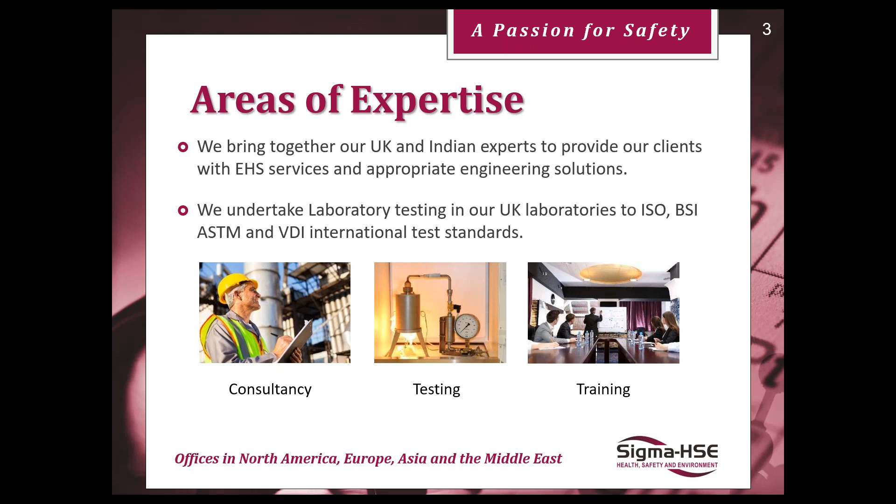We are a global company with headquarters in Winchester in the UK, as I've mentioned. We've also got offices and laboratories in India and a new office in the United States. Within the consultancy arm of the business, we deal with everything you'd expect in preventing and dealing with fires and explosions - all aspects of process safety management, industrial fire and explosion hazards, experts in electrostatics, and so on. We also do a lot of bespoke training for companies on these topics.

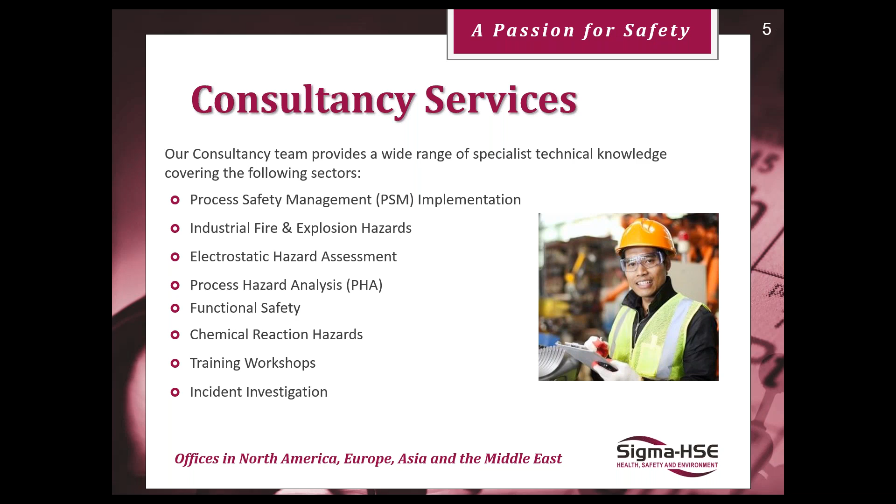We also have the luxury of accredited laboratories working under accredited quality management systems to pull apart substances and determine their properties, whether that's gas, vapor, powders, solids, electrostatic properties of materials, or chemical reaction hazards - calorimetry, DSC, differential scanning calorimetry, and all of these things - all with the aim of fully understanding the properties of the substance. Because everywhere in health and safety we need to do a risk assessment to determine that what we're handling, and how we're handling it, is done safely. We don't want fires, we don't want explosions. They tend to result in significant harm to humans, to the environment, and definitely to the business.

There have been lots of major incidents that have occurred with combustible solids. So what I want to do in the next 40 minutes or so is give you a few things to talk about and pass on some of my experience dealing with dust explosibility testing information, how that's used in practice, and why it's so important. My primary focus will take you through the tests and the sorts of information they give, but most importantly, how that test information is then taken within your processes to make them as safe as they can be.

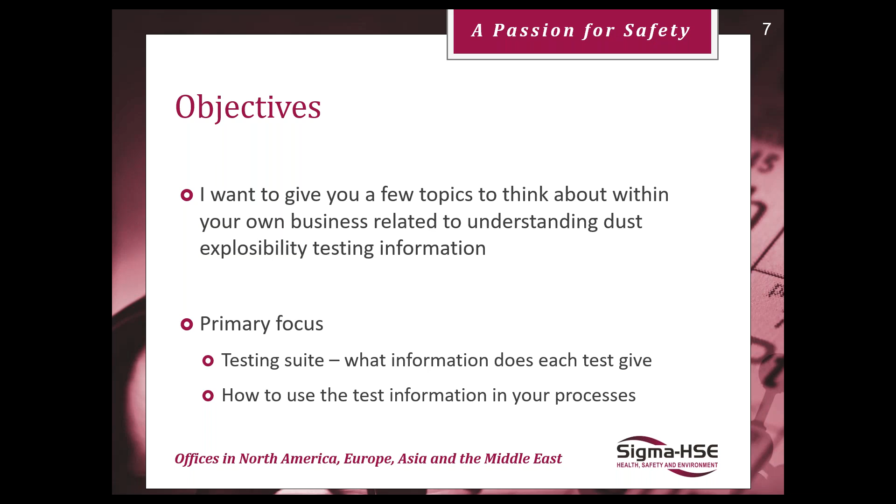As with any risk assessment, the first step is identification of the hazard. In many respects, especially when dealing with liquids and gases, we're given a clue as to what the hazard is because it comes with hazard pictograms on the container. I've given a couple here for toxic substances and flammable substances. If we're dealing with a flammable liquid like gasoline or acetone, the container and material safety data sheet will tell us how to handle that material properly and give us flammability conditions and properties of the material. When we're dealing with combustible powders, very often that's not given.

There are no pictograms that we stick on many powdered solids that could combust, and many of them are very common. Things we use in our kitchens at home, like flour, sugar, and icing sugar, will indeed combust, and combust quite readily.

But of course when we buy our bag of flour or icing sugar, it doesn't mention that it's a combustible solid. In an industrial situation we have the material safety data sheet, but very often that doesn't give us much information at all. It often simply states that it may be capable of combustion, but doesn't give any specific properties of that material, so it's a little difficult to use that information to prevent fires and explosions.

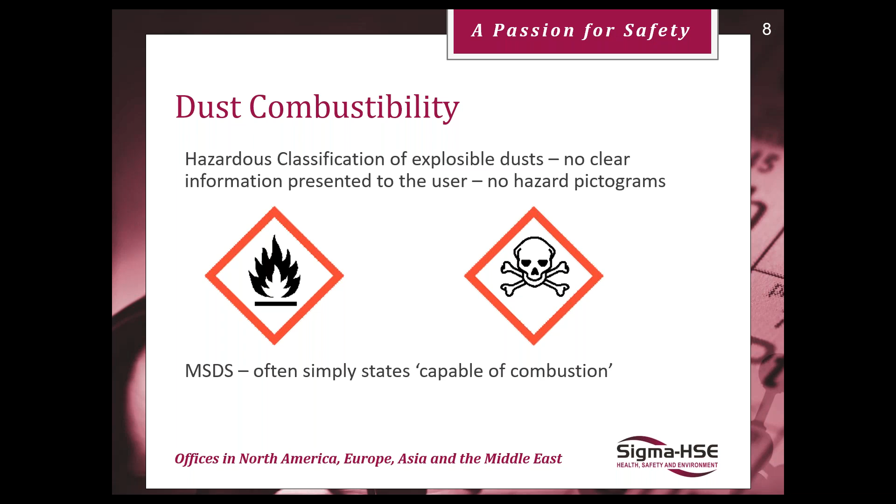As you'd expect, there's legislation on the topic - in Europe and similar legislation in the US and elsewhere. We have the ATEX legislation in Europe and the UK. Essentially, if I boil that legislation down into three simple questions, the first is: avoid generating what's known as a flammable or explosive atmosphere, which is basically a mixture of a fuel and air that's capable of combustion if it sees an ignition source.

This is simply built around what's known as the fire triangle. For combustion to occur, for something to burst into flame, we need a fuel, we need air or oxygen, and we need an ignition source. So very often, for example, for a flammable gas like natural gas, methane, when it's in the pipes it's 100% methane - there's no air in there, so it's not flammable, even though the container will state it's an extremely flammable gas. In practice, it won't be - it can't ignite because there's insufficient air.

Of course, if we have a leak from that system and release methane into the general atmosphere, it will then mix with air and produce this flammable explosive atmosphere. So the first point is: can we avoid generating that flammable explosive atmosphere? The second tenet of the legislation is, if we can't avoid generating that flammable atmosphere - because after all our containment systems could leak - then don't ignite it.

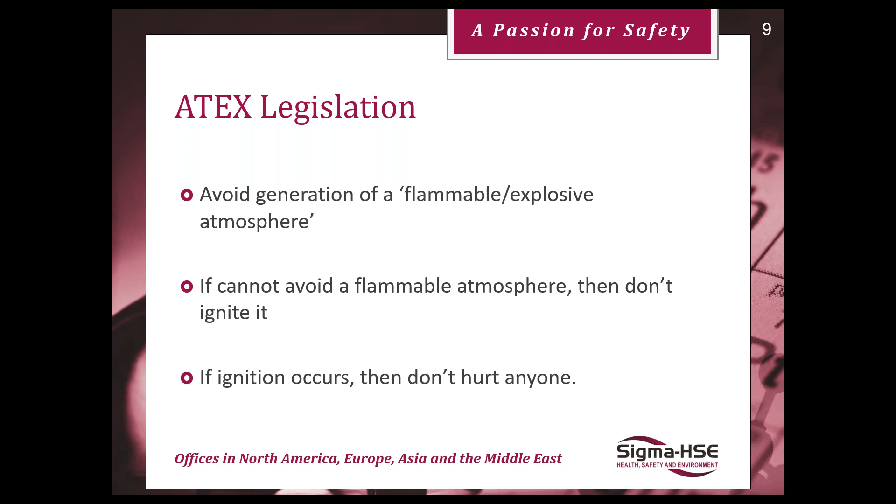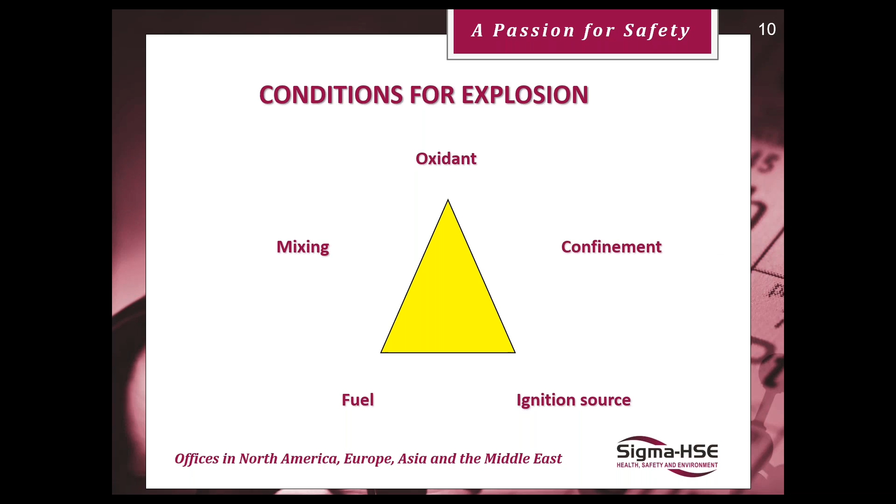So I talked earlier about the fire triangle. To turn that into an explosion, if we add into the fire triangle mixing - we get good mixing of the oxidant and the fuel - and we get some confinement that restricts the spread of the flame, then we can generate explosion overpressure. You often hear this talked about as the explosion pentagon.

Mixing a fuel with air in the open, we can still have the mixing, but the confinement won't be there, so we'll end up with a flash fire - we won't get any explosion overpressure from that event. But if that occurs within a container, like a silo or a pipe, then pressure can be developed, and it transitions into an explosion rather than simply a fire.

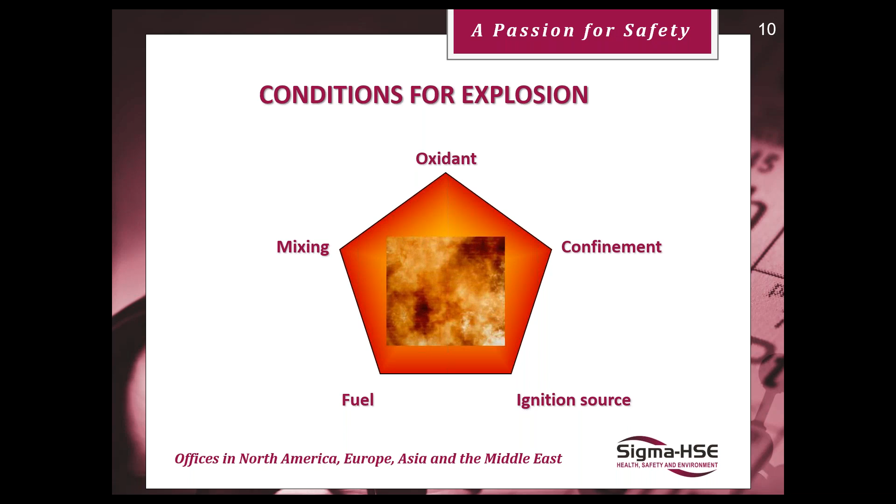Now let's go right back to basics and take you through what a combustion reaction really is. It's nothing more than a chemical reaction - we are reacting a material with oxygen. So if that material is not fully oxidized, then in theory it's capable of combusting, capable of reacting with that oxygen and generating an exothermic reaction. So it will generate heat that could result in flames.

It's worth saying that on the whole, liquids and solids don't combust - it's the vapors and gases that combust. As we heat substances up, they can generate vapors, and it's the vapors that mix with the air and then undergo this chemical reaction. So combustion is just an oxidizing chemical reaction - that's all it is.

There are many substances out there in the food world and the pharmaceutical world where they may not be classified as flammable or combustible, but they will combust.

Where solids are concerned, the reaction is no different, but for this we then become a solid reaction—it's a surface reaction. That oxygen needs to react with the powder, with the solid, and it can only do that by starting off surface chemistry in the first place.

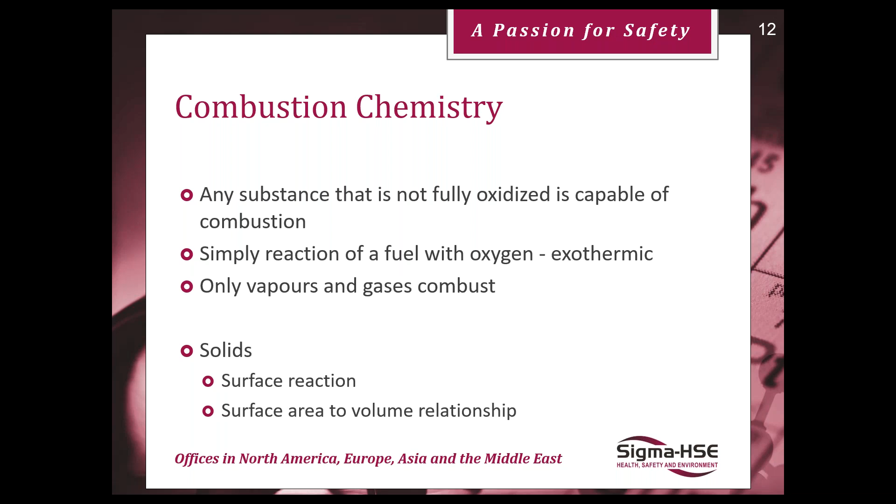Because of this surface area to volume relationship, the fineness of the powder, the dust, determines whether or not it's effectively going to be combustible. Generally speaking, we need powders fine enough that are less than 500 microns for them to be combustible. Now, many of the powders you use may not be that fine, but they may have a fraction of material that's less than 500 microns.

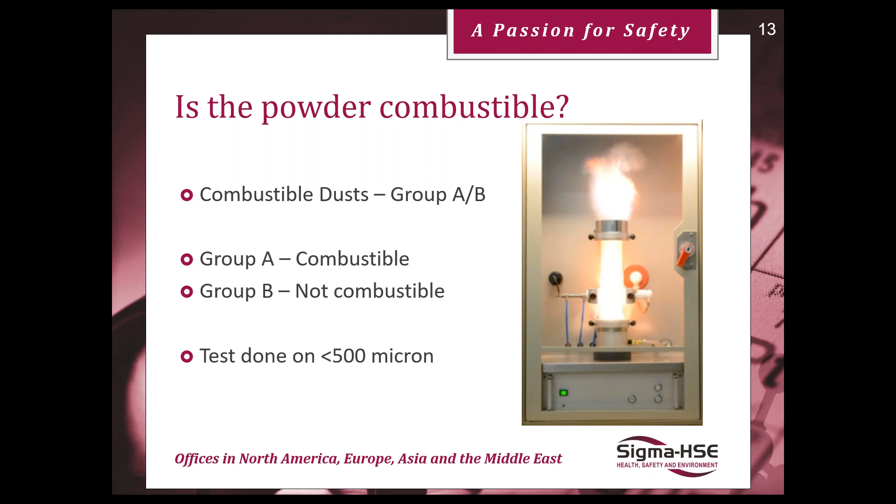In your actual process, if your processing operations aren't necessarily raising that fine material into a dust cloud, then that's fine. But of course, there'll be many cases in your processes where attrition can occur—the processing can break the material down into smaller particles. In certain processing operations, your dust extraction systems and collection systems, where you're deliberately taking out this fine dusty material, within those unit operations you are in fact generating the flammable cloud with very small particle size distribution material.

For example, when we pulse the air to remove these fines from our filter bags, to let them drop down into the collection chamber. So certain processes, especially if you're pneumatically conveying or have dust collection systems, will be handling the fines—you'll be deliberately taking the fines out of your processing operation.

So that simple test just tells us whether or not it's a combustible dust or not. And of course, if it's not combustible, everything's fine—you really don't need to build any precautions into it, because we're not going to be able to generate this flammable atmosphere.

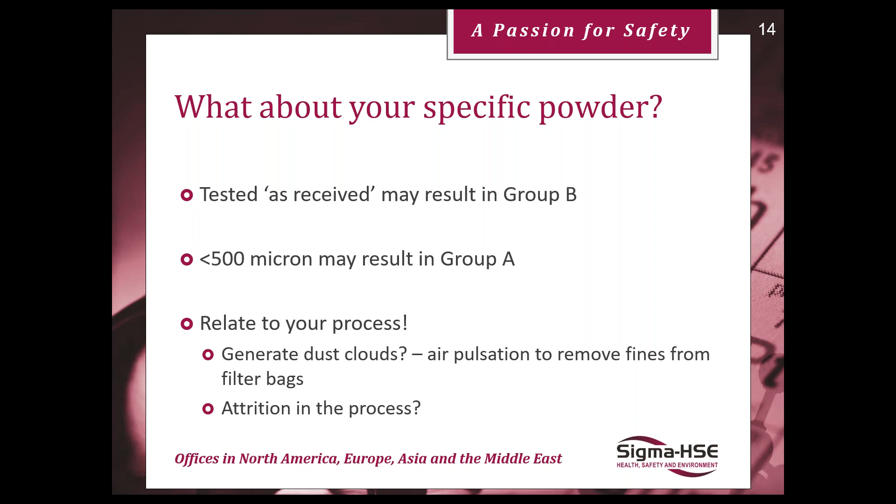But if it is a combustible dust, if it's a group A dust, then of course we've got the third part of the fire triangle, the combustion triangle. Well, how much energy do I need to ignite that material?

So a little example here, just to make what I've been talking about clear so far. If I take an iron bar, pure iron bar, we know that's not combustible. We can melt it in furnaces and manipulate it and shape it. And if we heat it even more, we'll end up with molten iron, but it won't burst into flame. It's not combustible.

But if you remember going back to your school days in the chemistry laboratory, you will have picked up iron filings where we've ground down that metal bar, and we've all tipped iron filings into a Bunsen burner flame, and we can see that we're starting to combust that material then. And if we grind that iron down even further and make it a very fine powder, it then basically turns into a spontaneously combustible or pyrophoric material. So as soon as it comes in contact with air, it will combust.

So particle size distribution is important, but then we've got to have a sufficiently big ignition source if we've generated that flammable cloud. And if we look in the standards, in the ATEX directive standards, we'll find that they state there are 13 potential ignition sources out there, many of which are quite common.

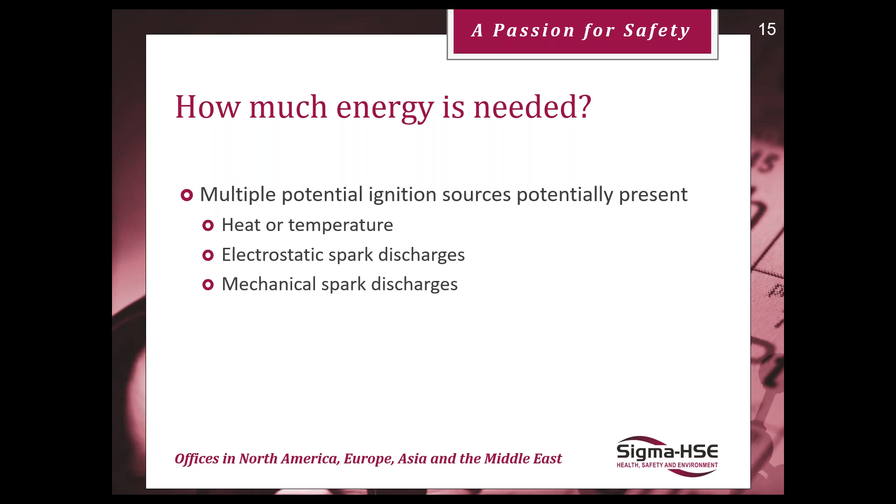So let's have a look at a bit more of the test procedures against these three most common ones. The first test is the minimum ignition temperature test. This is defined as the lowest surface temperature that can ignite an optimum mixture of fuel and air. So what this is doing is, if you generate a flammable dust cloud and the only potential ignition source is temperature, what temperature would it ignite at? That's the minimum ignition temperature.

It's similar to the auto ignition temperature for gases and vapors. So again, we simply generate that flammable cloud by pulsing air through a sample of the powder, again done on fine material, less than 500 micron material, and we do that test at different temperatures. And when it does ignite and we get a ball of flame coming out the top of the apparatus, that is the minimum ignition temperature.

So clearly, if you've got processing equipment on your site which is higher than that minimum ignition temperature, then it could be an effective ignition source. Conversely, if the temperatures of your equipment, your hot surfaces and things, are lower than the minimum ignition temperature, you won't result in the combustion reaction or an explosion, because you're operating below the minimum ignition temperature. Now that is ignition of the dust cloud.

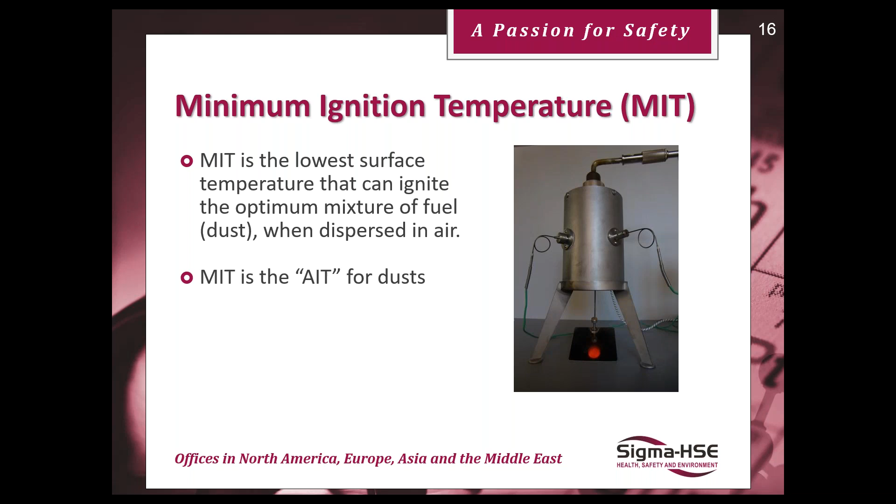Solids themselves can ignite, and this is what's known as the layer ignition temperature. We simply take a 5 millimeter deep layer of powder and we heat it up, and we see what temperature the surface of that powder bursts into flame. So that's the layer ignition temperature.

This is important, because if you're not particularly good at keeping your powdered materials contained within your equipment, and you have losses of containment, you've got dust that settles out on the rafters of your piping systems in your factory and so on, or onto the electric motors and things which can get hot, then you may end up with a fire because that layer self-combusts, because the temperature it's seeing is higher than the layer ignition temperature.

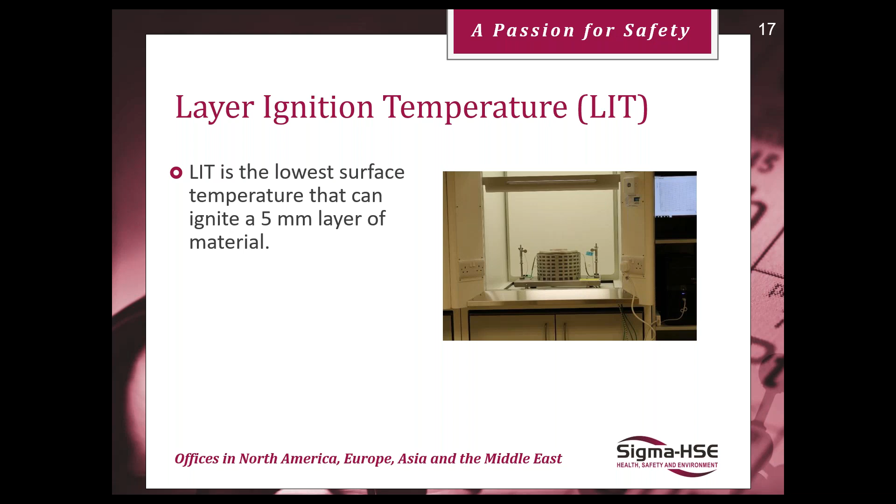Now these two test results, we take the results of these two tests and we apply a safety factor to both tests, and that sets what's known as the maximum permissible temperature that any of your equipment that is present within these flammable zones should not exceed.

The simple safety factor is that we either take 2/3 of the minimum ignition temperature value we've determined in the lab, or we take 75 degrees off the layer ignition temperature, and we use the lowest of these two computations to set the maximum permissible temperature.

So if you've got electric motors present, then they will generally have a temperature classification, but what you're trying to do is make sure that motor or whatever cannot generate a temperature greater than the maximum permissible temperature created from this safety factor computation, based upon the laboratory values of the minimum ignition temperature and the layer ignition temperature.

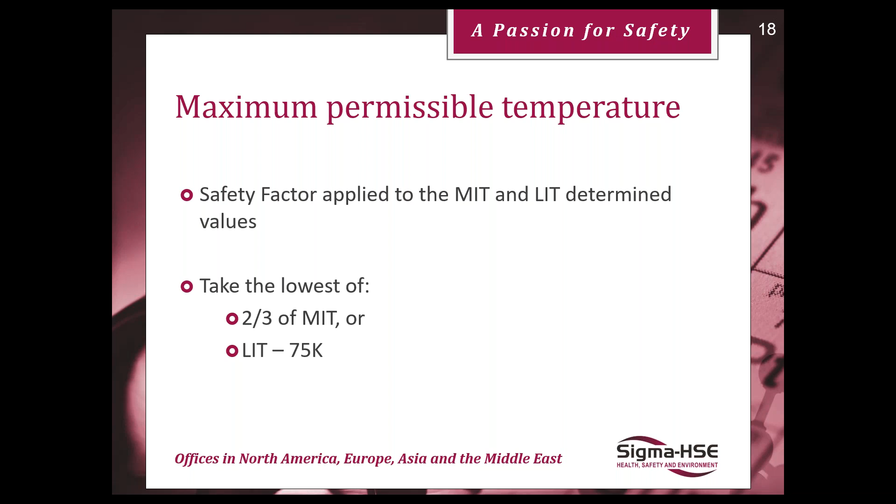So temperature can be a source of effective ignition. Electrostatics can also be a source of effective ignition, and you can see this equipment is very similar to what we look at for the combustibility group A-B test. But what we're doing here, we can alter the size of the energy of the electrostatic spark that we put through the dust cloud.

So this is determining the minimum ignition energy of a dust cloud. We can also generate that electrostatic discharge in two ways: we can either generate it capacitively, or we can generate it in an induction manner. When we use the capacitive methodology, it's giving us an indication of the minimum ignition energy from electrostatic ignition, from sparks generated due to electrostatic electricity.

And then when we do it under induction methodology, it's effectively generating sparks of energy that you'd expect from mechanical sources, friction, and this sort of thing. Once we know the minimum ignition energy of a substance, of a dust cloud, that can determine what we need to do to try and prevent that ignition.

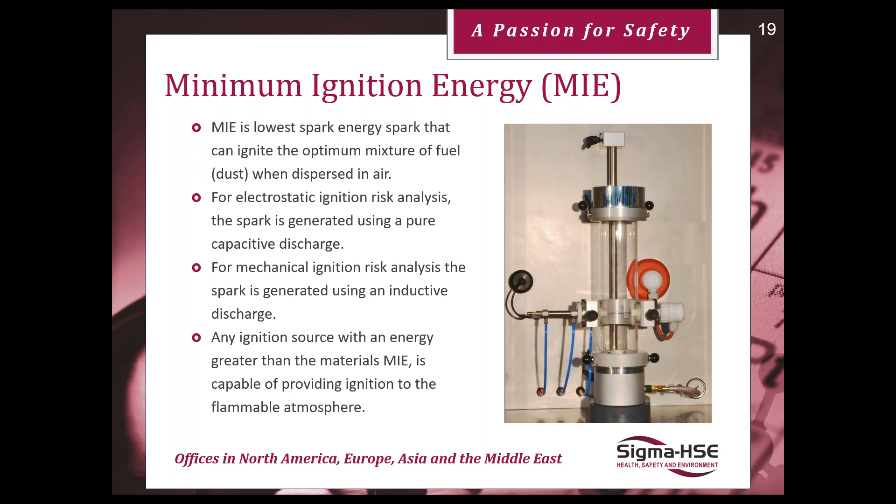Just some typical minimum ignition values that I've taken from the literature, and be aware, as I've been talking about, taking values for substances from the literature is not considered good practice, because as you can picture here, there's many different types of sugar, wheat flour, coal dust, wood flour, and so on. It's best to do it on the substances that you use rather than taking literature values.

But it gives the point that many active pharmaceutical ingredients have got very low minimum ignition energies. And very common things like polyethylene dust and aluminium dust are not that high either. Yeah, so many of these materials don't require a lot of energy to cause ignition.

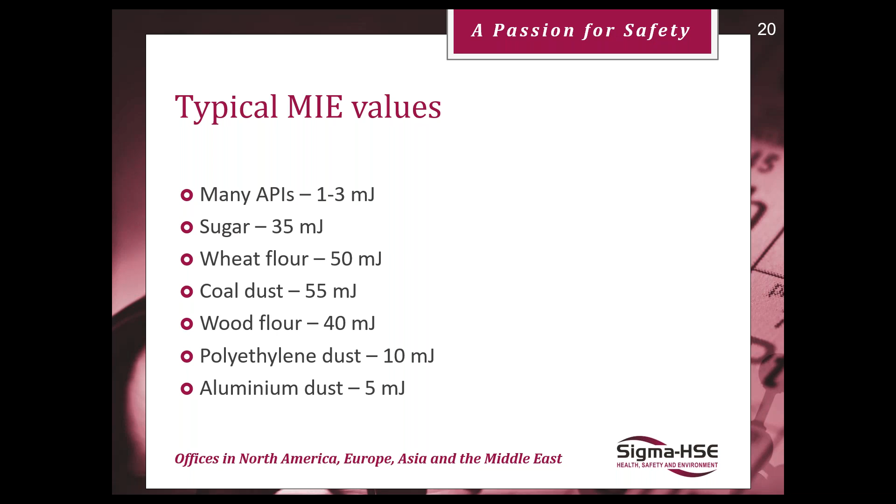Assessment of static hazards can be very complicated in a way, but what we're trying to do, to achieve ignition of a dust cloud, we need that flammable atmosphere, and movement of dust will generate charge. So pneumatic conveying of dust, mixing of dust, and filling of silos and things will generate charge by virtue of flow.

The electrostatic properties of the material itself, whether that's a conductive material or an insulating material, will determine whether or not that charge can be dissipated to earth or whether it can accumulate charge and keep hold of it for a long time.

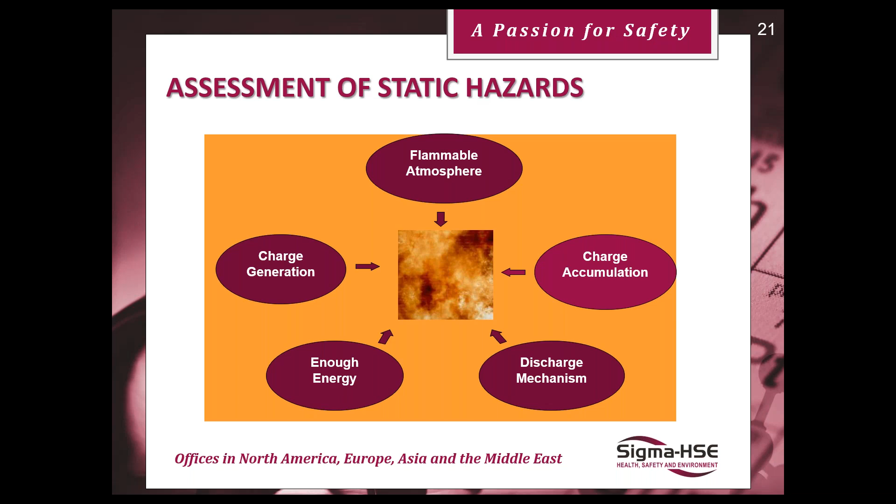If we've got charges accumulated, and there's a discharge mechanism, that's when we result in a spark occurring, and there's different types of spark that I'll take you through in a little while. If we're generating charge, if we've got a flammable atmosphere there, if we can get a discharge, and that discharge has got sufficient energy greater than the minimum ignition energy, then we could end up with a fire or explosion. With electrostatics, there's a number of types of static discharges, and this is an increasing energy approach.

Corona discharges tend not to ignite combustible dust. It's very low energy involved in a corona discharge. This is where you've got a sharp point where charge is accumulated, which is where the type of discharge comes from.

We can have a spark discharge, a brush discharge. Brush discharges tend to produce around about 4 millijoules of energy, so relatively low. But we've also found through experience that even materials with minimum ignition energies less than 4 millijoules will not be ignited by a brush discharge.

We can have what's called a propagating brush discharge, and this sort of discharge is associated with thin insulating materials. For example, if I've got two sheets of acetate film, like we used to have before laptop projectors, and we used to give presentations on acetate sheets, separating those two sheets apart can result in a propagating brush discharge. Propagating brush discharges can have energies measured in joules, so a large source of ignition there.

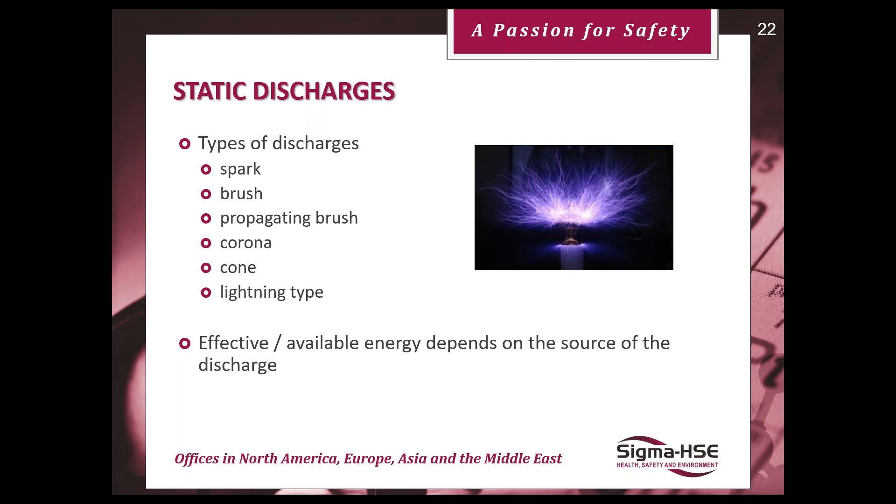So we've done our best to try and prevent ignition of a flammable cloud. In terms of eliminating or preventing the flammable atmosphere, things I'm not talking about today - this is where you'd use inerting, or work under vacuum, or reduce the level of oxygen or air present in the atmosphere. That can avoid the generation of a flammable atmosphere.

Avoiding electrostatic and mechanical ignition sources can be achieved by good earthing and various other techniques, which I'm not going to go into in any great detail today, because it'd take at least another two hours going through those sorts of things. But we've done our best to prevent.

That third step I mentioned was, if an ignition source does occur within a flammable atmosphere, then what actually happens if it's ignited? Well, obviously, we result in generation of flame, and because we've got a combustion reaction, we've got the potential, if it's confined, for rapid development of pressure.

So if you picture it on your processes, if an ignition occurs within some of your processing equipment, within your dust collector, within some of your pneumatic transfers, within your mixing systems, then you'll generate flame and you'll generate pressure. And of course, if the pressure's too high, higher than what the containment system can contain, you'll start blowing the equipment apart and generating missiles and so forth.

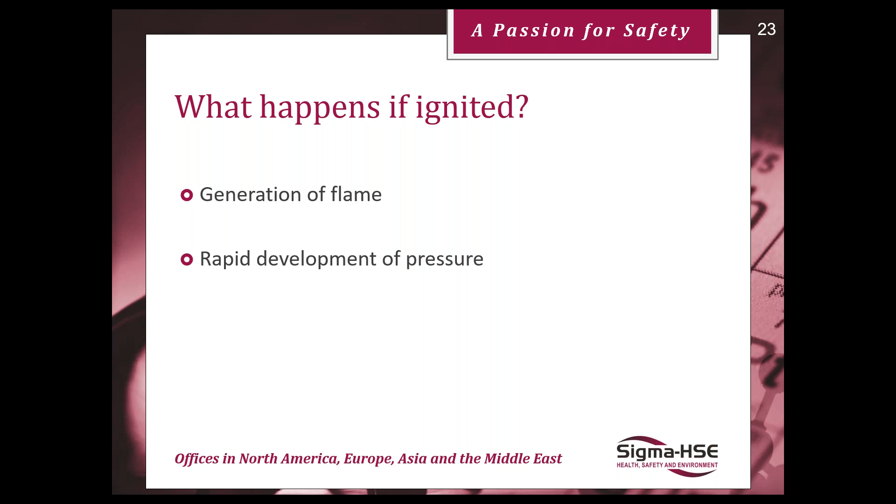So, armed with this knowledge, we can then design precautionary equipment to install on our equipment to deal with this generation of flame and rapid development of pressure, to stop the equipment from being blown apart. And the test that's done to generate this sort of information is known as the 20-litre sphere explosion severity equipment. You can see a picture of it here.

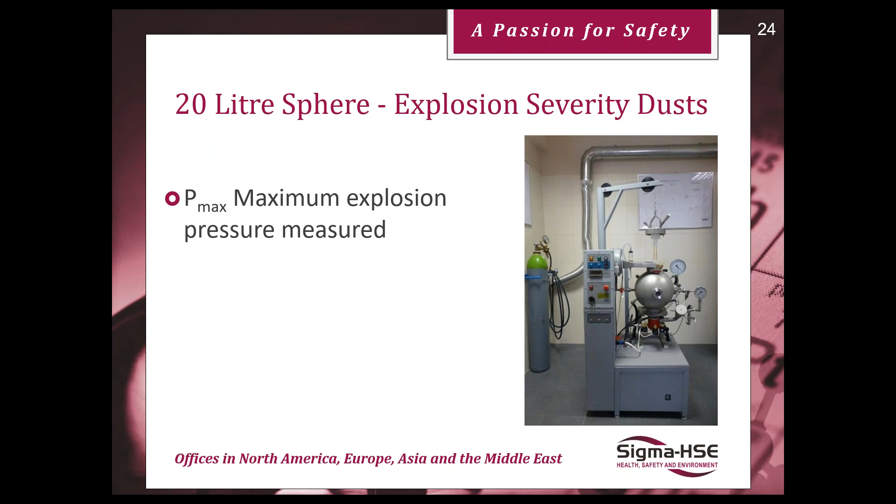Okay, so what this - again, it's very similar to the rest - we put a sample in, we generate the dust cloud, and we put an ignition source through it. But this is a very high integrity pressure system, and we can measure the pressure, so we can measure the maximum pressure that that ignited event will generate. And we could be talking in excess of about 12 bars, so a significant pressure.

It will also measure the rate of pressure rise, the dP by dt, how quickly that pressure is generated. And once we know that value, we can then look up and determine what's known as the dust constant. So we can have what's known as an ST1, an ST2, or an ST3 dust. And the higher the number, the greater the maximum rate of pressure rise - the more vicious the explosion is, the more rapidly it occurs.

So things like metal dusts and certain active pharmaceutical ingredients can be ST3 dusts. Many foodstuffs are ST1 dusts. They'll still explode, they're just not as vicious. Maximum explosion pressures are reduced, and the rate of pressure rise is reduced also.

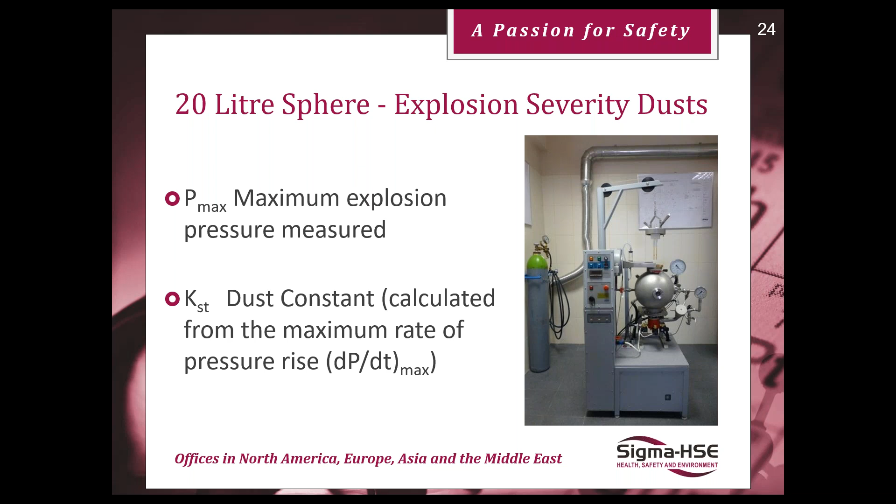Once we have this data, we can then use it to stop blowing bits of metal around our plants. It's what's known as the basis of safety. We can design things to deal with that ignited event, and there's generally three approaches that we take.

We either contain the explosion overpressure. So the containment system, the mixer, the ductwork or whatever, is built so robustly that it can withstand that rate of pressure rise and maximum pressure. There are two types of containment equipment: one that will contain it with no deformation, and one that will contain it so the effects of the flame and explosion pressure won't be outside the containment system, but it will deform the equipment. In the former, where it's not deformed, you can clean it out and start your equipment up again. If it deforms, then it's weakened, which essentially means that equipment needs to be replaced. It's about building that containment system to withstand the pressure and temperature that could occur, using that test data.

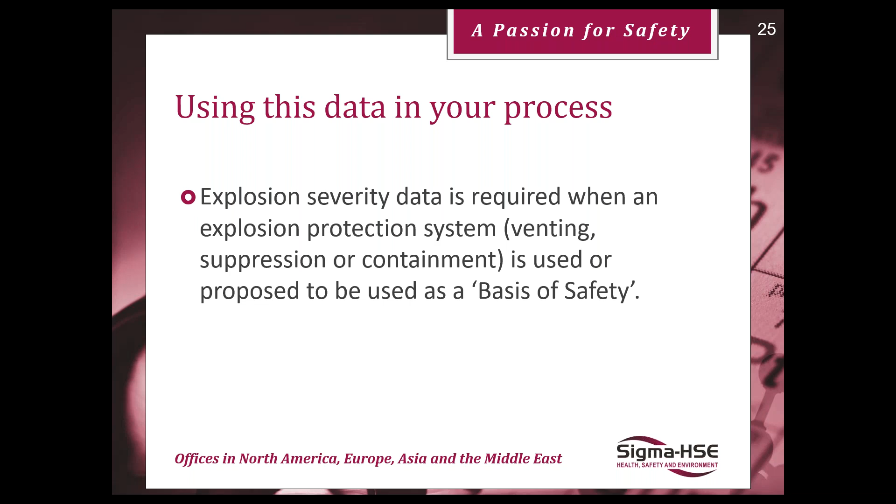So I've ended a bit on a downer there. But you know, these are the things that we see in practice when we are looking at systems that are out there in the real world, designed to keep us safe.

It's important to state that when we're talking about powders, many of these properties are not calculable. They need to be measured in laboratory conditions under specified methodologies.

There's many ways of stopping these fires and explosions. As I've said before, prevent the formation of the flammable atmosphere. Within equipment, that's generally done by either working under vacuum or working under nitrogen atmospheres or inert atmospheres, limiting the oxygen concentration.

Prevention of ignition to try and stop the ignition occurring - and that in itself is a whole topic on its own, which undoubtedly we will do a webinar on in the near future on electrostatics. We did one relatively recently. But also designing your systems to be able to deal with ignited events.

So hopefully there's been something that I've said today that will spark some interest, spark some things in your mind that we better go out and check. Do we have this data? How do we know that our systems that we've got are effectively designed, are fit for purpose?